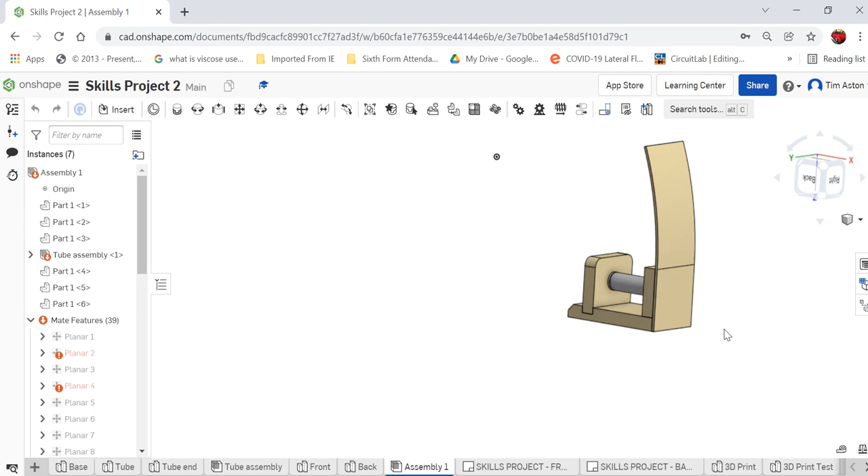Okay, so welcome to this tutorial where we will be drawing all the component parts to make our skills project, and they will be assembled like so. So we'll be learning to draw the parts and assemble them. We'll also learn how to create our own working drawings from this in Onshape as well.

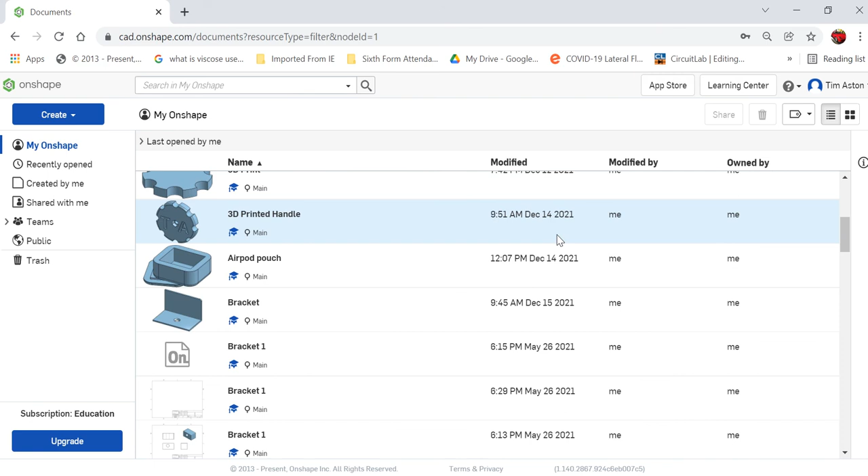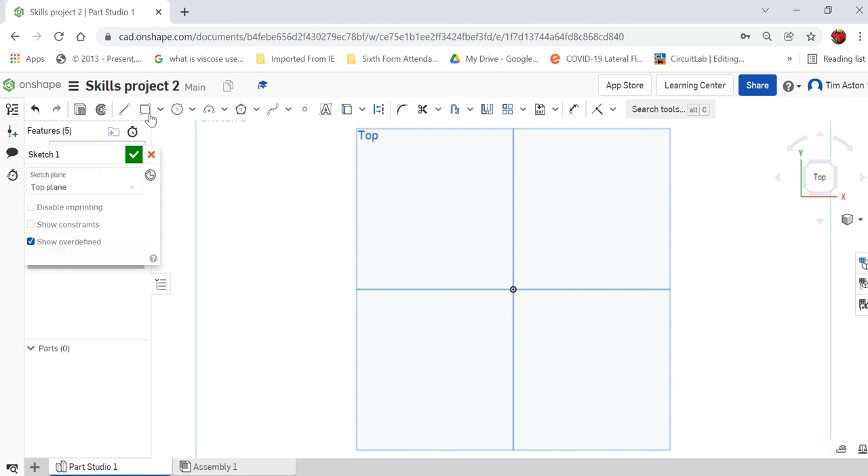Right, so the first thing we need to do is create a two-dimensional sketch. We will click on the sketch tool, and we've got these work planes here, and I'm going to click on the top plane, and we're now in sketch mode. Now, as we're creating a two-dimensional sketch, I really like to look at it two-dimensionally, so I'm going to click on our navigation cube, click on the top, and I'm going to draw a rectangle, and the rectangle wants to be 70 by 120 millimeters.

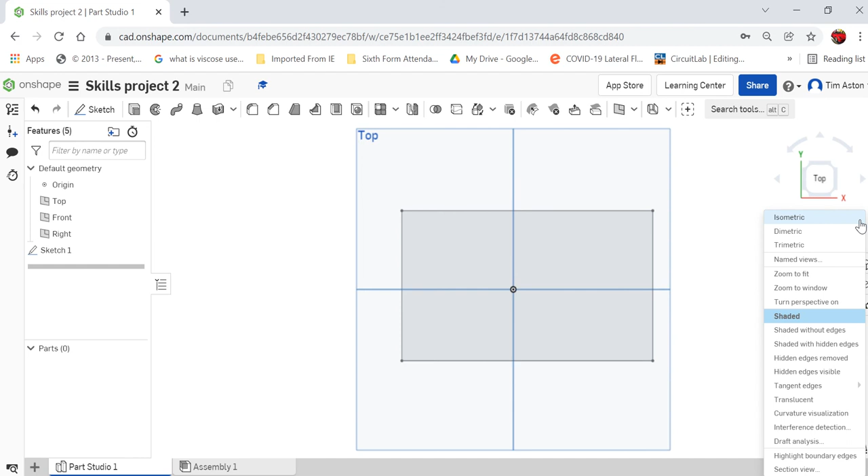So if you look at the top, it's 124.5 is open. I can edit it, so I'm going to type in 120. I'm going to press the return button, and it will also allow me to edit the other dimension. I'm going to change this to 70, and I'm going to click the tick, and I'm going to now click isometric to give me an isometric view, and I'm going to turn this from being a two-dimensional sketch into a three-dimensional solid.

So I'm going to click the extrude button, and I'm going to click on our sketch, and it will allow me to turn that into a three-dimensional solid. So this needs to be 15 millimeters thick. So you notice I'm changing the dimension to 15. So I'm going to click the tick to confirm that. So that's my base. The next thing I want to do on here now is create another sketch.

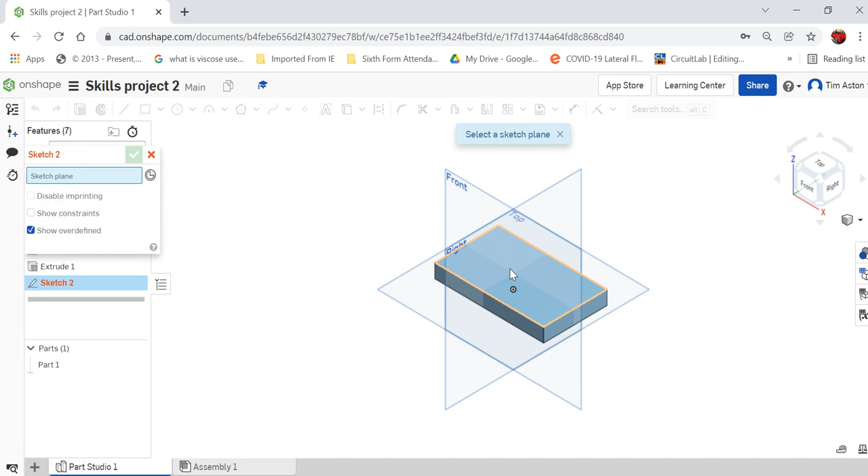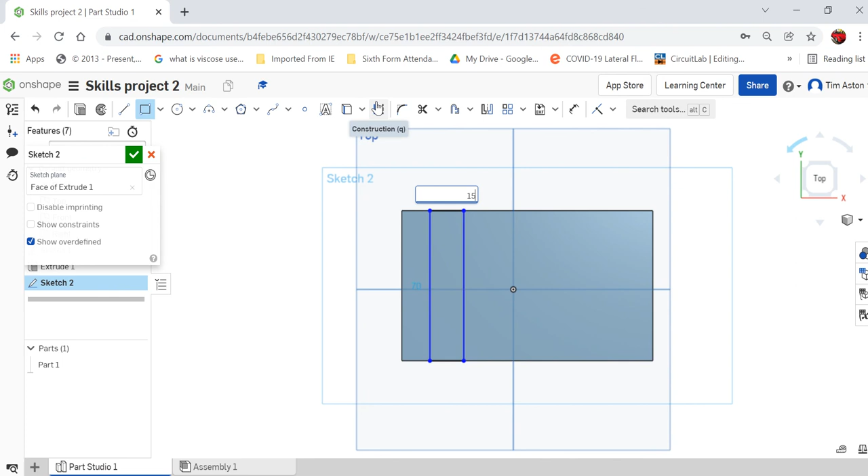I'm going to click sketch. I'm going to select the top plane of our solid we've created, and as we're in sketch mode again, I'm going to click on the top, and I'm going to draw a rectangle. And the rectangle, I'm going to hover my cursor over that top line. You'll see that line there go orange, which means I can connect to that there. And I'm going to go to another one there. And this one here, the width of the rectangle wants to be 15 millimeters. So I'm going to type in 15.

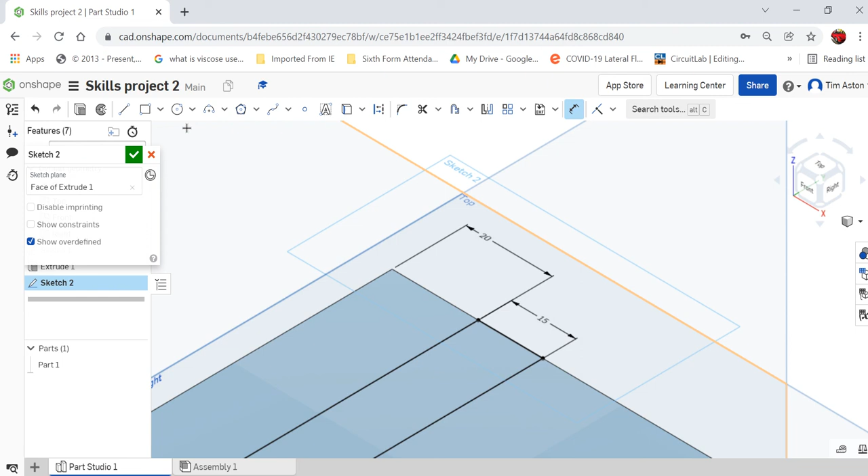Now, we also want the rectangle to be 20 millimeters away from that back corner. So I'm going to use the dimension tool, and I'm going to click that point, and that point there. And it might be easier if I just go into isometric. I'm going to zoom in and just select that point there and that point there. Click the dimension. I'm going to change that to 20. And what that's done is it's moved that rectangle 20 millimeters in from that edge. I'm going to click the tick to confirm it, and I'm going to go for an isometric view.

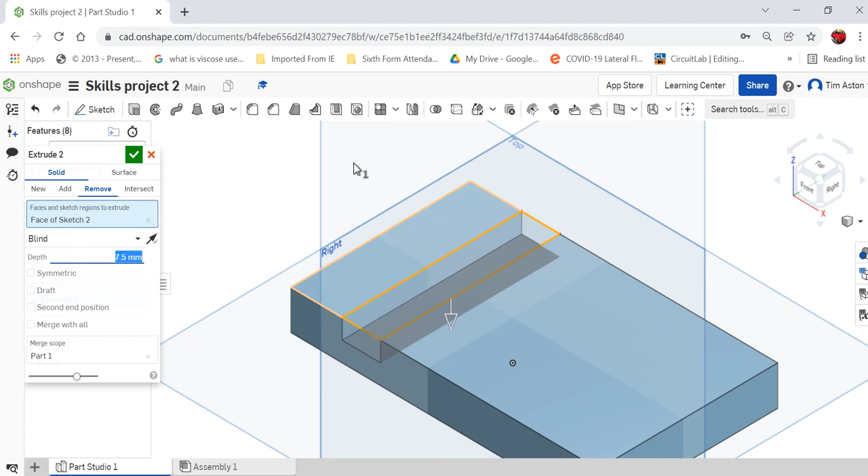And what I want to do now is use the extrude tool. Now, instead of using it to add material, I want to use it to take material away. So I'm going to click that there, and instead of that there, so it says add here, I'm going to remove. And it wants to go into the solid. Now, this is 15 mil thick, so let's go 7.5, change it to 7.5, and it will create our housing there. The next thing we want to do is do our slot for our finger joint.

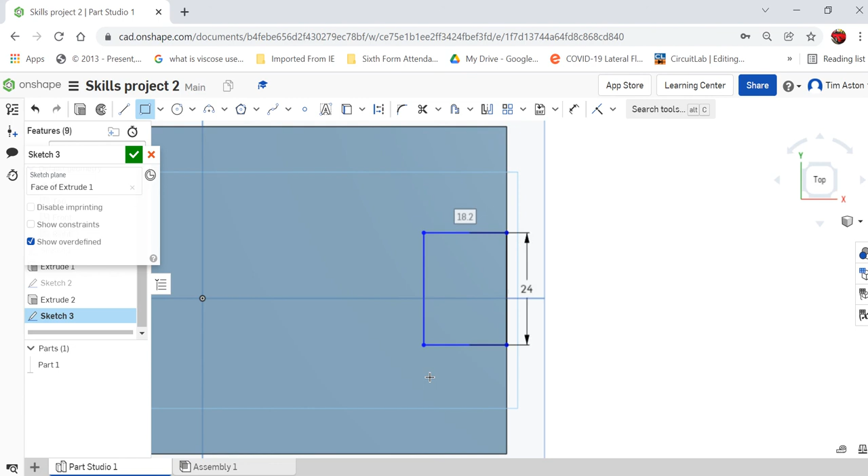So I'm going to click sketch, and I'll click this top plane there, click on the top, and I want to draw another rectangle. So I'm going to draw a rectangle. I've clicked on that line there. Now, this size here wants to be 24, and this dimension here needs to be 15. And I want this to be 23 millimeters in from the top. I'm going to change that dimension to 23.

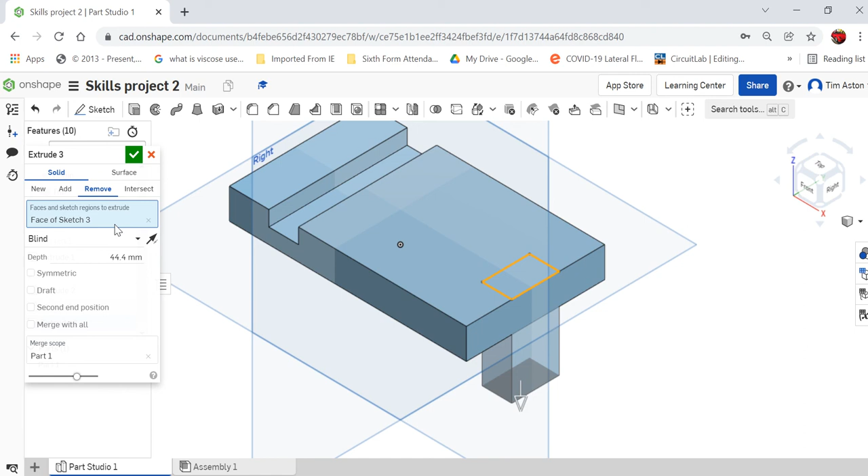I'm going to click my tick, and I'm going to go to isometric, and again I'm going to click my extrude button here, and I need to take it down that way there, and I want to remove material, and I'm going to change my extrusion to 15 and click the tick. So we are very nearly there.

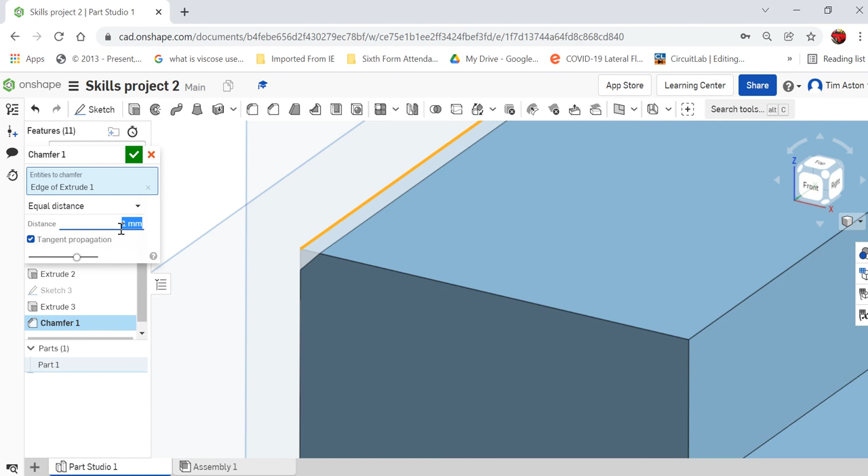The final thing we need to do, the final skill that we've learned is the chamfer tool. We've done it in real life, so we want to use a chamfer here. So I'm going to select the chamfer tool and I'm going to click on this edge here, and it's given me a chamfer of 1 millimeter. I want to do our chamfer as being 7 millimeters. So I'm going to change that to 7 and click the tick. And if we zoom out, that is that component part created.

Now in the Part Studio, because we're going to create quite a few parts, we need to organise this quite well. So I'm going to rename this part here and we're going to call it base. And we will leave it there. So well done.